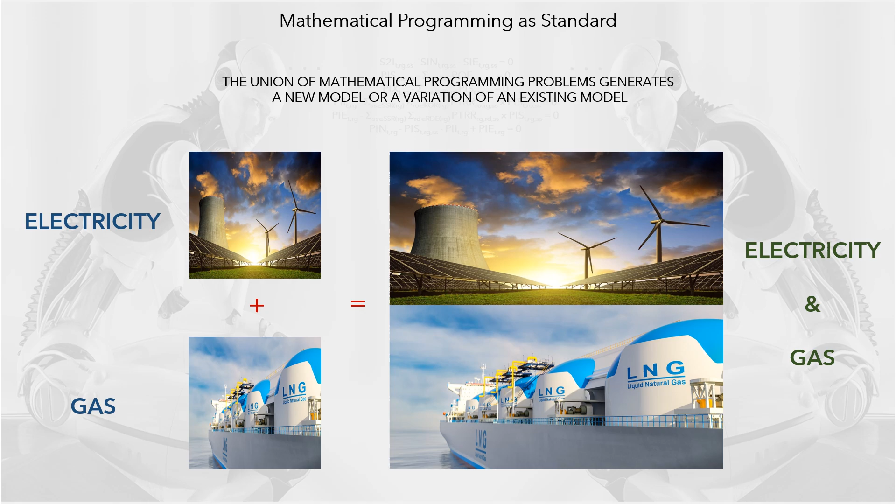natural gas supply chain. OPTEX's multi-problem model capability implies that the union of mathematical programming problems generates a new model, or a variation of an existing model. In this case, two models are formulated: electricity dispatch, and natural gas dispatch. These fundamentals give rise to modeling based on multiple optimization problems, which is the holistic foundation of an organization, called enterprise optimization. The diagram presents what happens when this model is solved optimally. The two problems exchange information, either occultly in a monolithic model, or explicitly in a partition model.

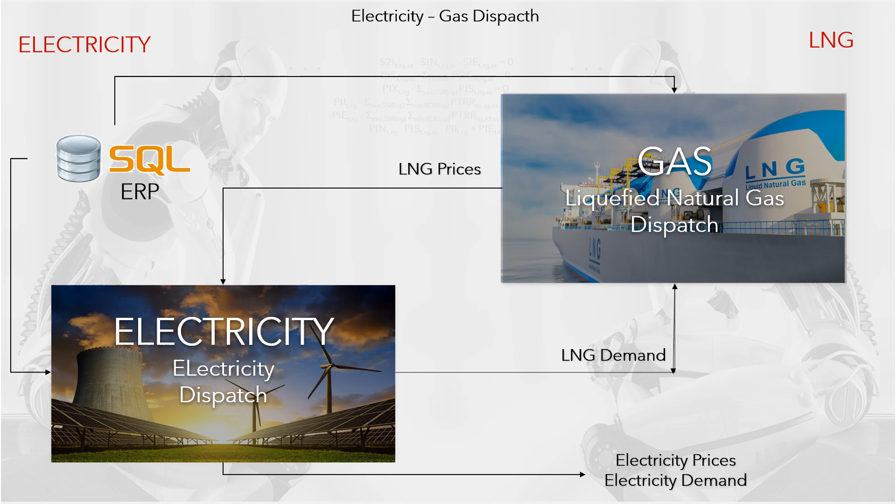Multi-problem modeling without problem limits is what facilitates the theory of multi-problem models, which in turn are the basis of artificial brains, as it allows us to join, divide or modify problems, when necessary and possible. In this way, the core of problems that define high power can be formed, which is electricity, gas and water. The artificial hypothalamus of high power dispatch is composed of these systems.

In general, in an artificial hypothalamus each model can be associated with a type of model. All models communicate via a database, in RAM, or on disk. Making complex models as a Lego game. The expert optimization system is supported by the artificial hippocampus, which stores structures and processes for scientific decision-making that must be permanently consulted. It stores, like in humans, the experience, and the knowledge acquired over time.

In the case of model formulation, a modeler should not repeat work every time he modifies a model. The joining, or splitting, of the models is done by keeping the records in tables. That is, in practice, formulating a problem is selecting, by clicking, the equations that compose it. In the same way models are formulated, as if they were a Lego model, which are formed by a set of equations, the Lego pieces.

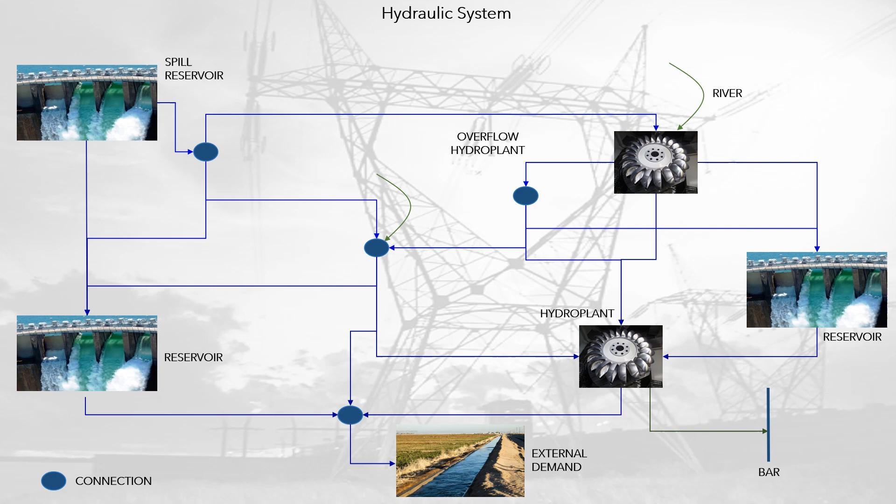Physical modeling, hydrosystem. HI-Water corresponds to a general model that includes all kinds of hydraulic components: reservoirs, hydroelectric power plants, pumping stations, pumping storage, rivers, overflow channels, connection points, demands, irrigation, aqueducts, environmental, industrial. Components can be freely linked to form any topology. Hydroelectric power plants are modeled independently of reservoirs, so plant-reservoir and reservoir-plant connectivity must be established.

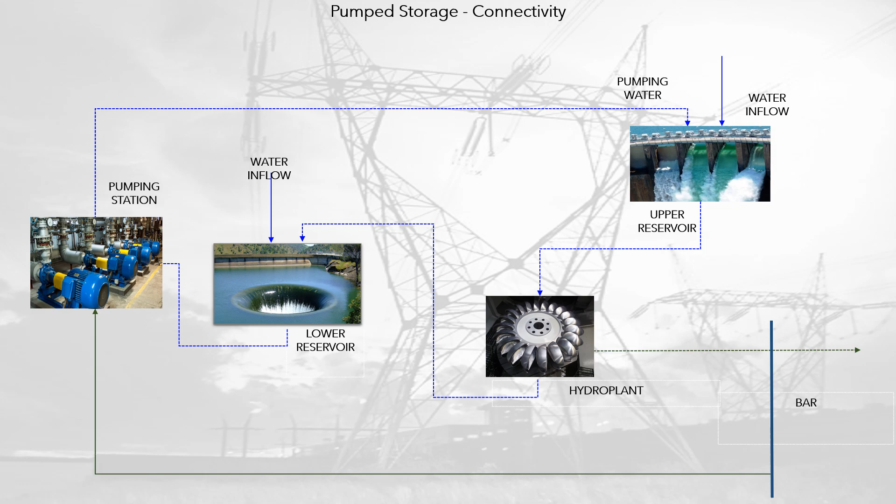The regulation capacity of the reservoir is simulated in detail, so such a simulation consistently represents the dispatch of the power plants, considering their ability to regulate the multi-annual, annual, hourly water resource. For special reservoirs, it is possible to generate established operating rules based on agreements or laws that must be observed when using water resources.

Electrical system. Electrical connectivity is carried out through a network of circuits, links, and bars, nodes, that integrates different types of installations: power plants, hydroelectric, thermoelectric, coal, wind, solar, biomass, places of demand, industrial, cities, regional interconnections and energy storage.

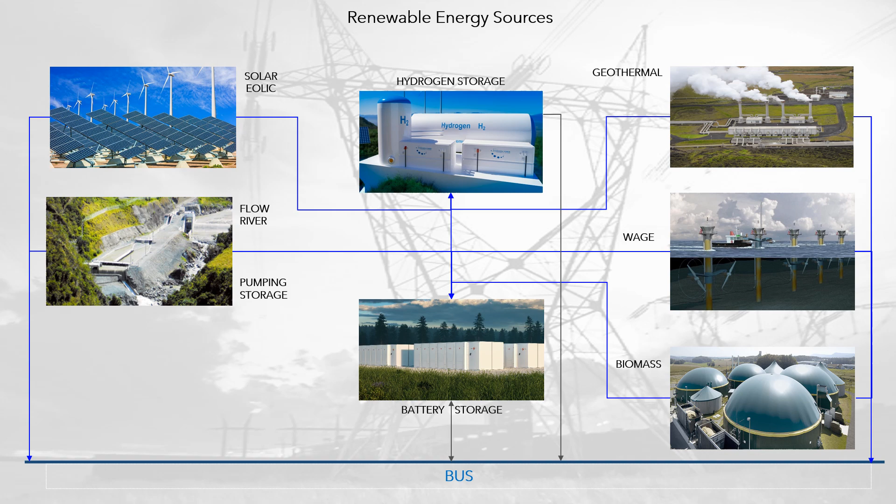For each type of electrical infrastructure, high power includes the exact equations for simulation. High power includes the simulation of several types of renewable energy sources and energy storages.

Gas system. High gas describes the process of supply and demand of natural gas. From this point of view, its integration with the electricity system determines the economic balance electricity-gas. The entities of the natural gas system are: nodes, which connect the gas system installations; production fields; consumption zones, discriminated by sector, for example, refineries, heavy industries, residential, vehicular, and commercial; thermoelectric power plants; transport systems, pipelines, and multimodal transport systems using

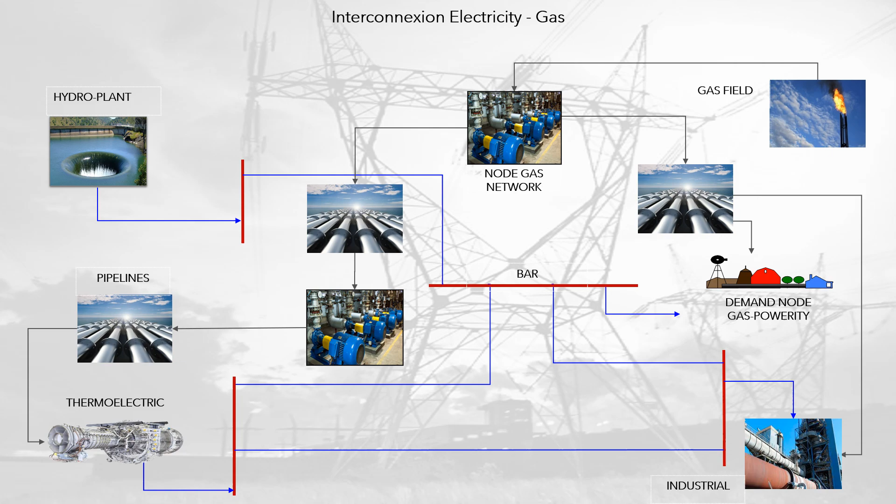vehicles; pumping stations, which compress the gas to transport it; and ports, which receive and/or ship liquefied natural gas, LNG. They are associated with liquefaction and/or regasification plants and have gas storage capacity. Connectivity between the electricity and gas sectors occurs through the demand for natural gas for use in thermal plants, and the substitution of the demand that can occur between gas and electricity.

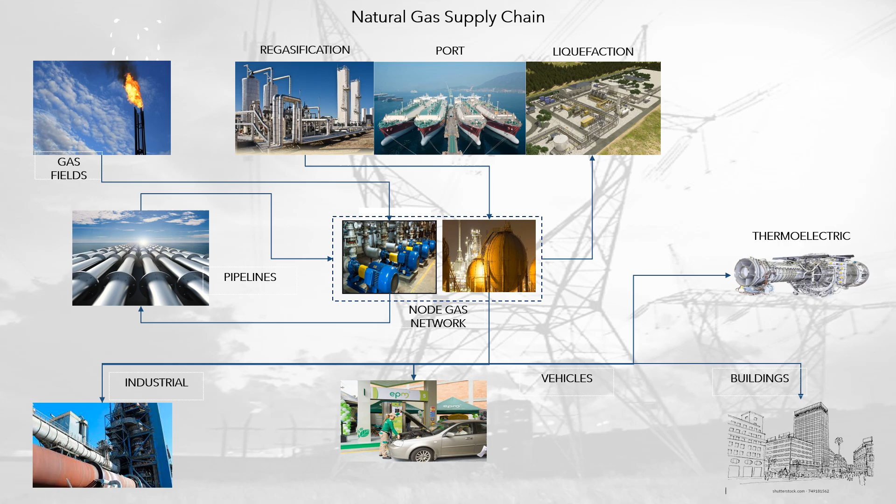Electricity system and wholesale market mathematical models. Traditionally, the optimization models in the electricity sector have been individual modeling with exogenous coordination between models, based on multi-stage stochastic programming, and using large-scale optimization methodologies. The differences provided by high power are integrated holistic modeling, scientific risk modeling, multidimensional uncertainty, parallel optimization, and autonomous real-time

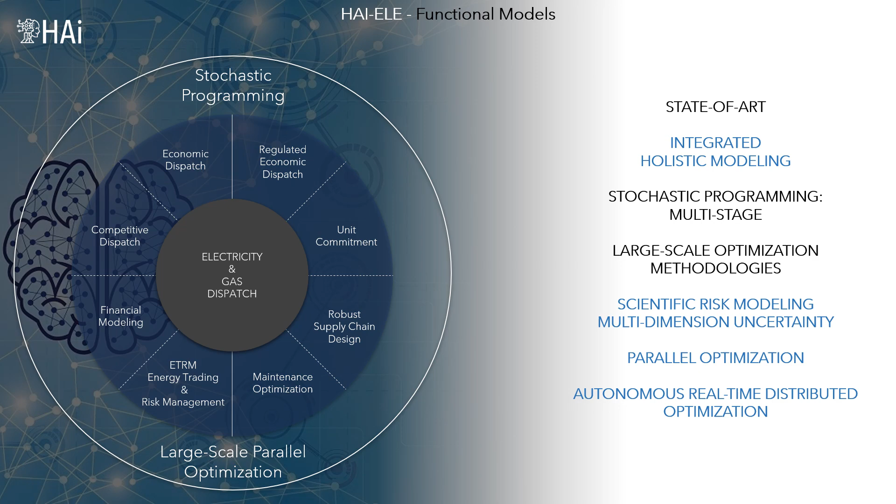distributed optimization. The EED, electricity economic dispatch, model optimizes the dispatch of generation infrastructure, minimizing the cost of operating the electricity system, which simulates a perfect electricity market. EED is the core model of HAI-ELE, as its equations/constraints are used in multiple specific models that the agent requires to address decision support needs.

From EED, 4 models of complementary dispatch are built: economic perfect dispatch, economic regulated dispatch, Nash-Cournot equilibrium dispatch, and unit commitment. The first 3 models are oriented to planning and the fourth to real-time programming. All models that integrate HAI-ELE have been developed using the OPTEX GAMS interface. The integration of the models is carried out automatically by OPTEX, and the generated programs coordinate their communication through the database, using monolithic models, or in RAM memory using large-scale parallel optimization.

All HAI-ELE models can run in deterministic or stochastic version with user-definable uncertainty dimensions. Models can be solved using large-scale technologies, such as variations of Benders' theory, or Lagrangian relaxation, using parallel optimization to simultaneously solve all the problems in which the monolithic model is atomized. Finally, it is possible to introduce new models into HAI-ELE as required.

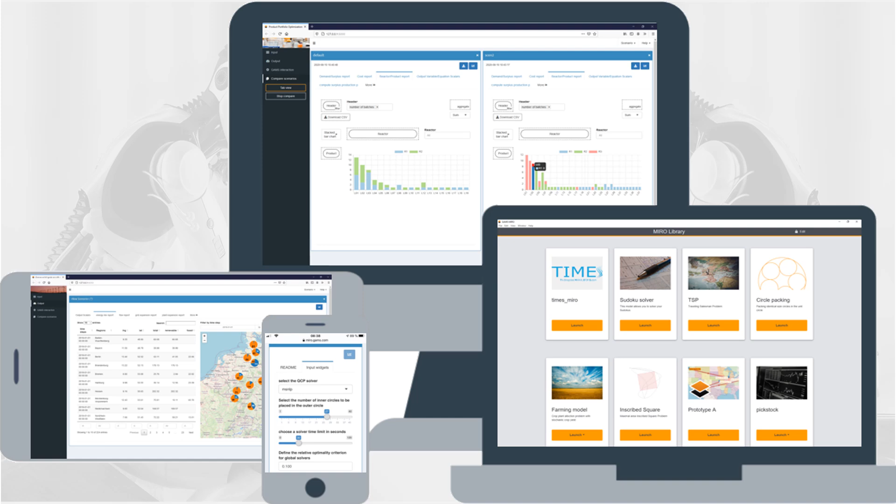GAMS MIRO is the deployment environment for GAMS models. GAMS MIRO desktop is installed locally on a computer, and it is an interactive interface for GAMS models and to deploy them locally or in the cloud. The GAMS MIRO connector is the interface for communication between GAMS and MIRO. This component takes over the data management on the GAMS side.

GAMS Engine is a REST API designed to run in cloud environments. It is an enterprise-grade system that runs on a server and offers features such as high scalability, load balancing via a job queue, rolling updates and much more. GAMS Engine automatically schedules jobs and assigns them to an available GAMS worker to solve it.

Also, it comes with a powerful user management system that allows you to restrict the activities of your users according to your organizational hierarchy. GAMS Engine can not only be controlled by a MIRO application. Thanks to the use of OpenAPI, clients in various programming languages are available. HAI is working to interface OPTEX with the new GAMS optimization technologies, linking OPTEX to GAMS optimization technologies.

The HAI-ELE database is part of a relational information system that integrates all HAI-ELE data. It is managed by OPTEX. It is called IDIS, Industrial Data Information System. In this regard, the following should be considered. The data model is defined in the OPTEX dictionaries, based on metadata from the fields in the tables. The basic structure of the data model can be generated by OPTEX.

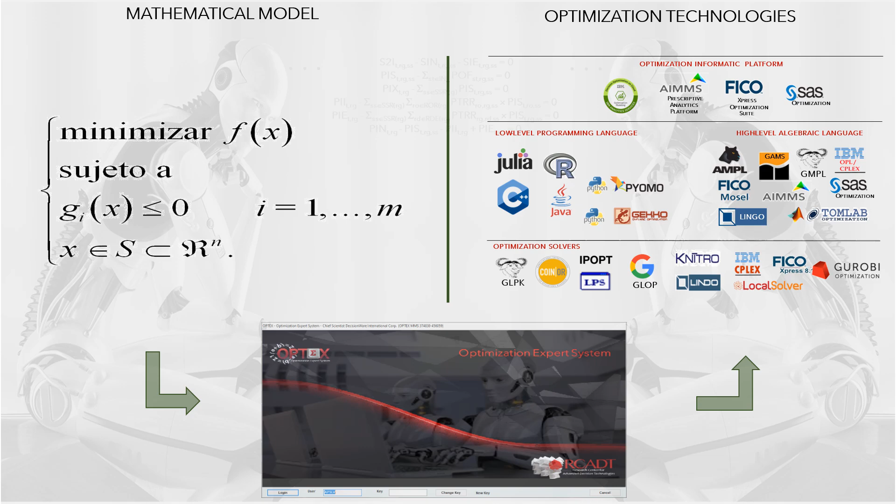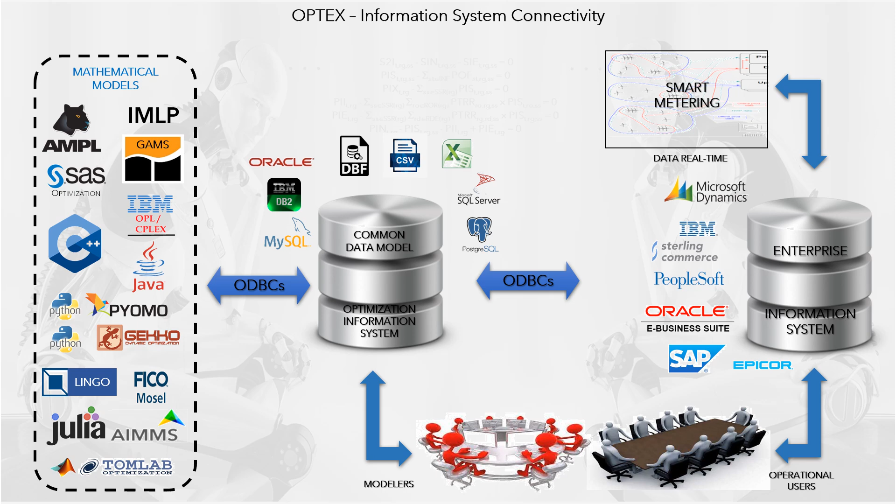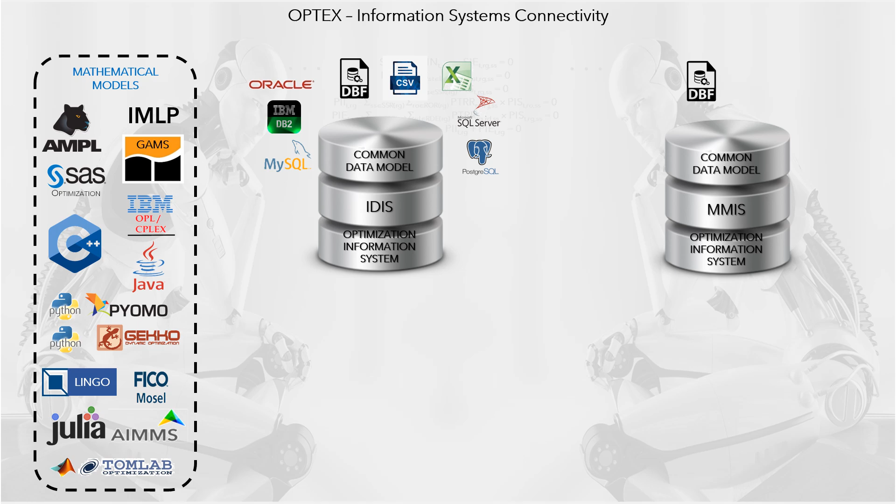The fundamental elements of the OPTEX architecture are a relational information system, which integrates two specialized information systems: Mathematical Modeling Information System, MMIS, stores the entire mathematical modeling environment, and Industrial Data Information System, IDIS, stores customer data.

The next element is OPTEX, the generative artificial intelligence in charge of interpreting the existing information in the MMIS, and from there generating all the computer elements that are required for the user to interact with the DSS. Based on Open Database Connectivity, ODBC, OPTEX generates the following elements: visual interface for the user to access the IDIS to maintain and consult it.

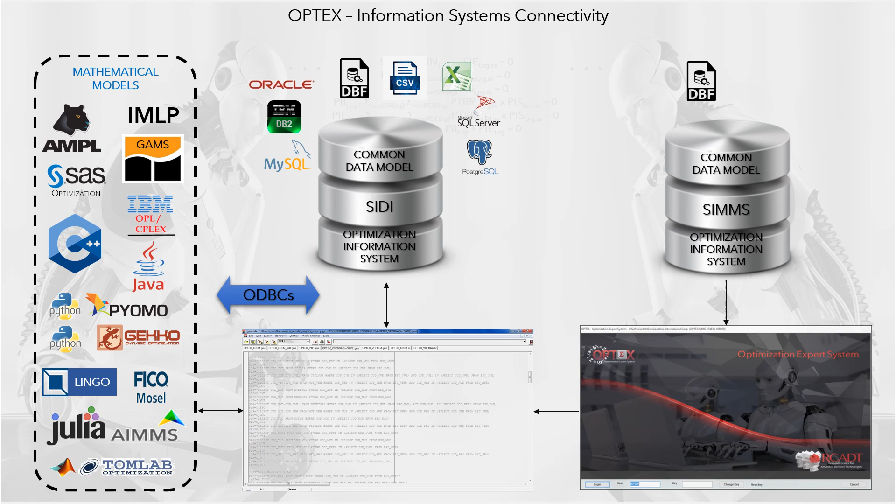Interface for mathematical models to connect with the IDIS, generated following the syntax of each optimization technology. This interface is part of the computer programs of the algorithms. Below are several examples of this type of component, based on SQL statements. The image features standard OPTEX GAMS connectivity.

OPTEX generates all GAMS programs in a multi-problem model, and the user selects the solver to be used. Program generation is done using OPTEX, which then generates all programs needed to run the model using GAMS, General Algebraic Modeling System.

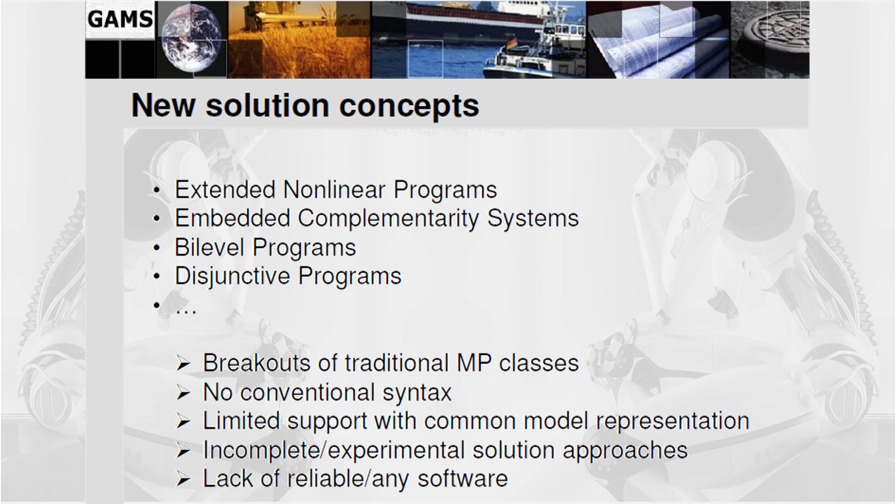OPTEX directly connects the advanced concepts of GAMS, so that the user can use them in the formulation of their model's advanced optimization methodologies, such as extended nonlinear programming, embedded complementarity systems, two-level programming, disjunctive programming, and others. This will not involve programming. The connection to the advanced GAMS concepts is carried out automatically by OPTEX.

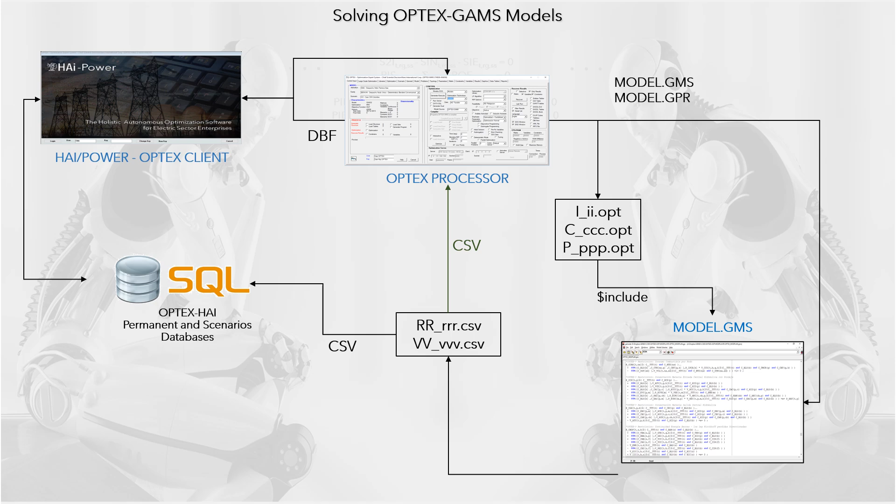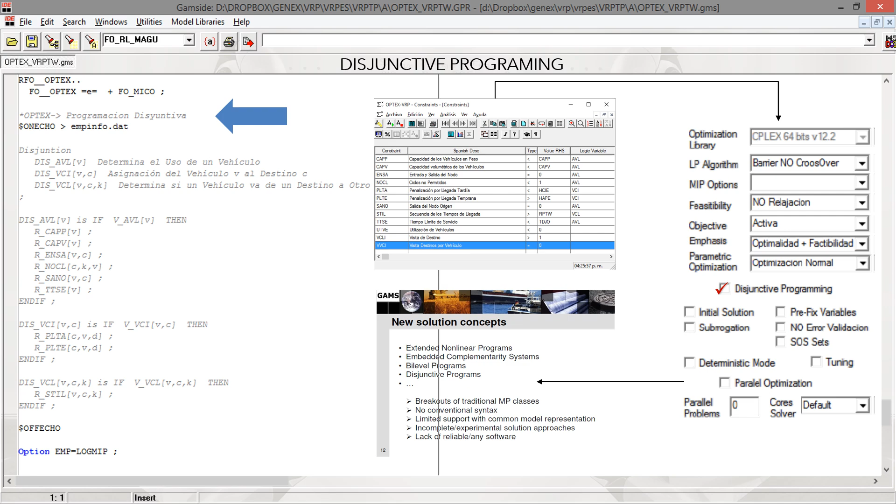The data connection can be made through text files, .opt, which will be incorporated through the $include instruction, or reading directly from a SQL-like relational database. Second, indicate at the time of execution that disjunctive programming must be activated, for those constraints that have a logical variable assigned. The screenshot shows the code generated by OPTEX GAMS to perform the activation of disjunctive programming.

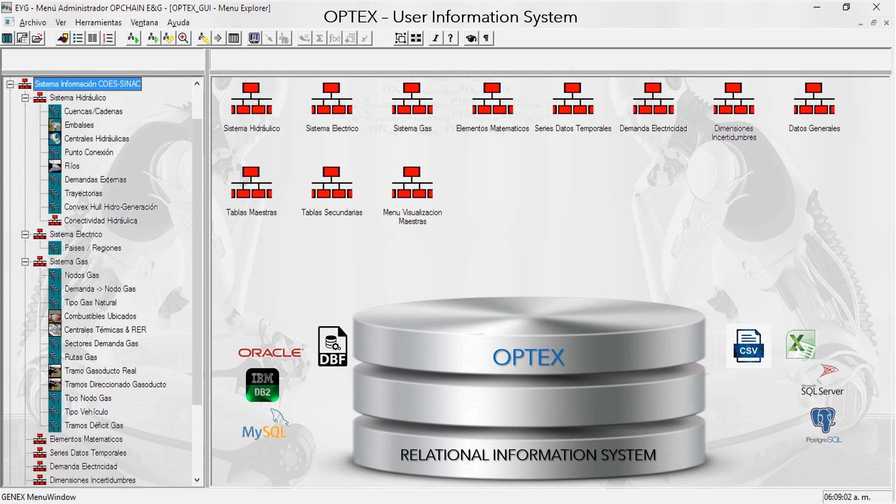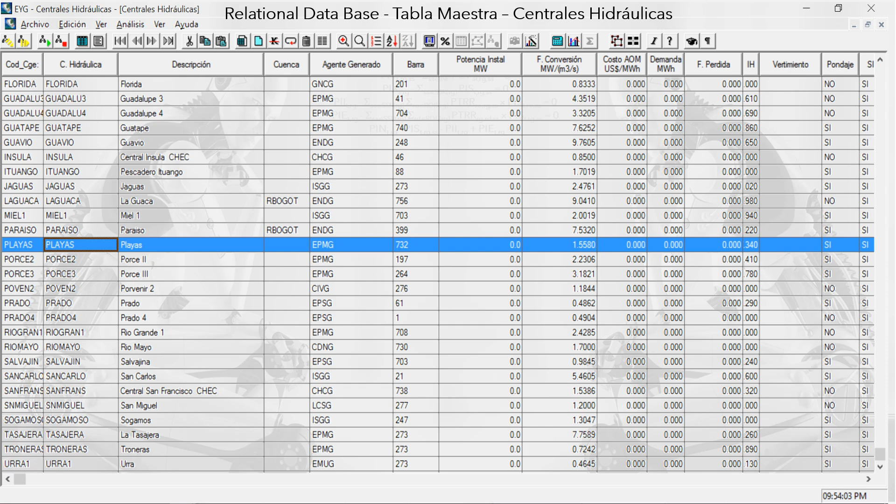The screenshot features a shell window that contains multiple data windows. In this case, the master table of reservoirs and its related tables. The screenshot presents the master table of hydropower plants.

To handle multiple studies, the information system includes the concepts of scenario family, such as the 2014 studies for the expansion of the MODPLAN design, and the scenarios associated with each expansion plan studied. The OPTEX graphical user interface handles all the input and output data associated with each scenario. It is a similar concept to the GAMS MIRO scenarios.

Hydropower Dispatch Model. GAMS programs. OPTEX manages 4 types of models, all of which are used in the hydropower construction process. This is valid for any mathematical model made with OPTEX. Deterministic optimization model. This is the standard or core model, which considers a single internal scenario.

Non-anticipative stochastic optimization model. Starting from the stochastic parallel model, a non-anticipatory response is required, that is, the decision depends on what is happening in the stochastic dynamic process. In these cases, each scenario has its probability, looking for a solution that optimizes a measure of system performance by integrating the scenarios, such as expected value or other statistics. The solution must be obtained by introducing a model coordinator aimed at ensuring the constraints of non-anticipation and the optimum of the objective function.

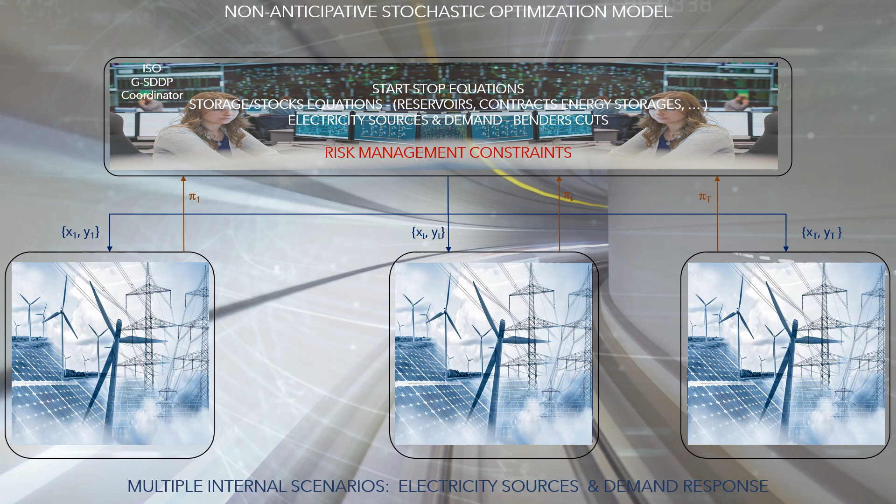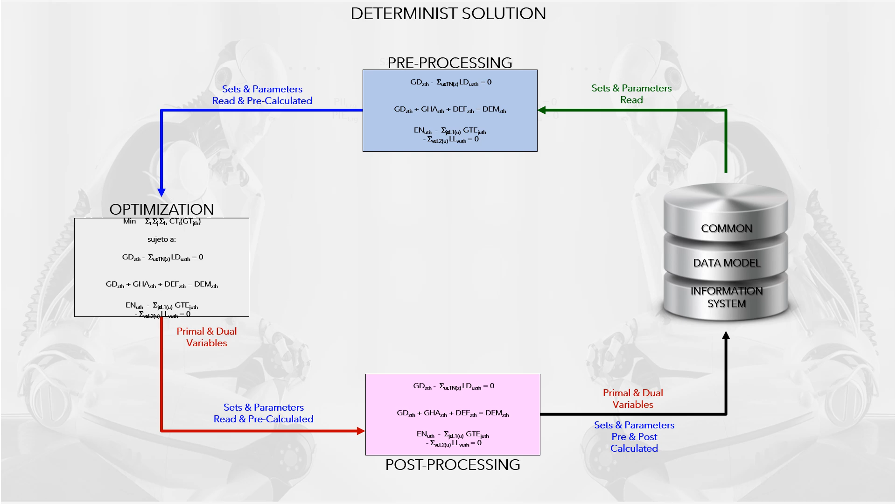Hydropower dispatch deterministic model. GAMS program generation. Deterministic models operate without cycles, solving a single monolithic problem, which has 3 steps. Pre-processing, reading the database and calculating everything that needs to be adjusted before performing optimization. Optimization, solving the math problem, and post-processing, calculation of result variables that are definitions that are not part of the model, and storage of this information in the database. This part of the program is presented below.

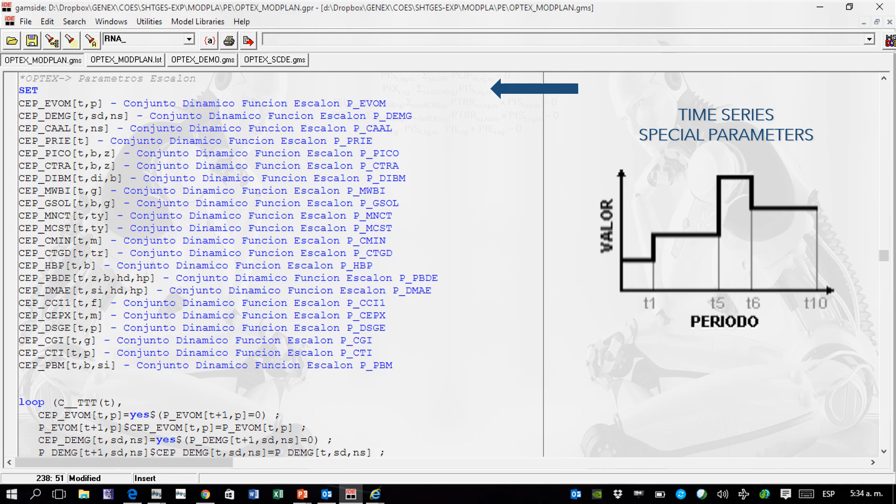The GAMS program is presented in parts, indicating in each case the content of the partial image. Model header and indexes declarations. Alias indexes declarations. Time standard parameters declarations and reading. Using an include file. Read sets declarations and reading. Read parameters. Transformation of read time series parameters. From the data read in the tables, OPTEX can calculate 3 types of dynamic parameters: impulse, polyline, and stair.

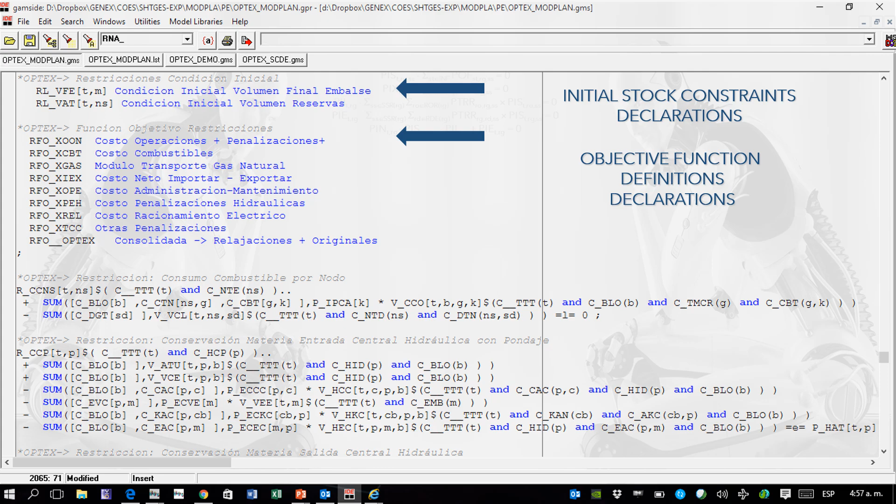Calculated parameters and calculated sets. OPTEX solves the correct order for declaring parameters, sets, variables, and constraints, considering the relationships between them. This is a common problem in other algebraic languages. Model variables declarations. Objective function variables. Model variables bounds. Constraints declarations. Initial stock restrictions declarations and objective function definition instructions.

Constraints algebraic formulation. Conditions of existence constraints. Conditions of existence variables. Objective function equations. Creating CSV files. Model variables include. This code is included in the program using an include.

High power dispatch, ModPlan model, transmission expansion planning, Peruvian transmission system. Project: electric and gas system and market dispatch for Peruvian transmission expansion plans. Challenge: to develop an integrated electricity and gas dispatch model to support the optimization of the national plan of transmission in Peru. Solution: design and implementation of a set of mathematical models that includes simulation of simultaneous optimum dispatch of electricity and natural gas systems, and the evaluation of multiple expansion uncertainty scenarios, to build Pareto curves that support the selection of a robust expansion plan.

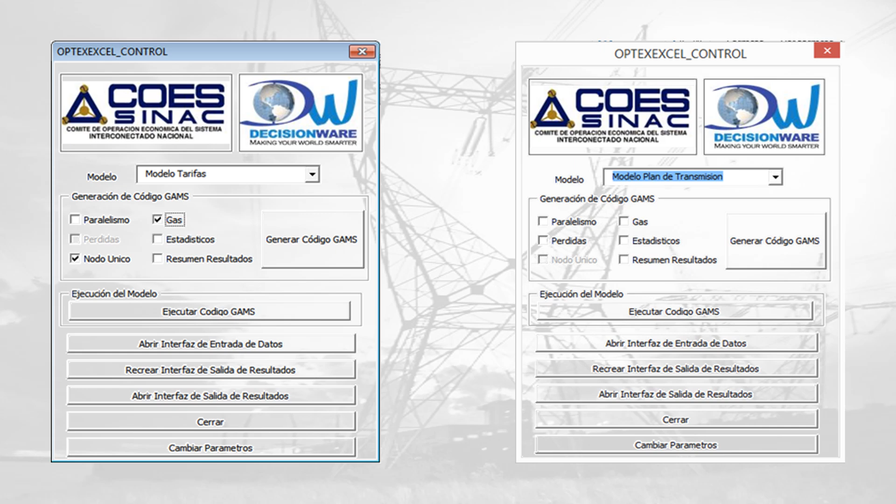ModPlan is made up of 3 models. ModPlan rates, a version of the Perseo model, which Osinergmin uses for the price analysis of the Peruvian interconnected system. ModPlan, the central model for the construction of transmission system expansion plans, and ModPlan attributes, a post-processing model that produces indicators of the operation of the interconnected system, for the analysis of an external scenario of the expansion plan. The screenshots show the ModPlan control from an Excel sheet, which is used by the analysts who build the transmission expansion plan. The ModPlan model was developed using a high-power version mounted in OPTEX, as a starting point.

COES-SINAC, the ISO of the Peruvian electricity system, must build the expansion plan of the transmission system in accordance with the methodology specified by the Peruvian law. ModPlan considers two types of scenarios, internal and external. The internal ones are those considered by the stochastic optimization model. These are called by COES futures, and are built based on multiple uncertainty dimensions.

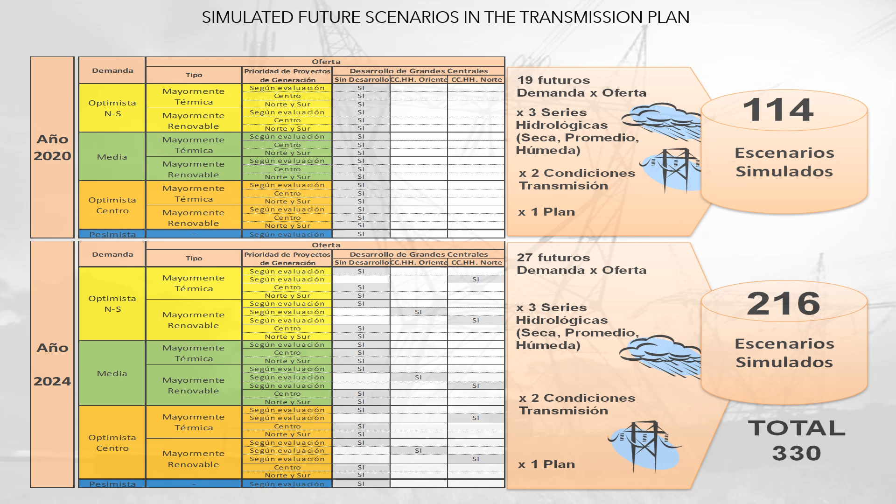The model runs every certain number of years for an external scenario, which corresponds to a possible expansion plan. One of the external scenarios analyzed will be the solution suggested by COES for the expansion plan. The image presents two periods, 2020 and 2024, the first with 114 internal scenarios and the second with 216. Examples of dimensions of uncertainty: fuel prices, hydrology, demand, investment of generators, variation in the costs of works, and others.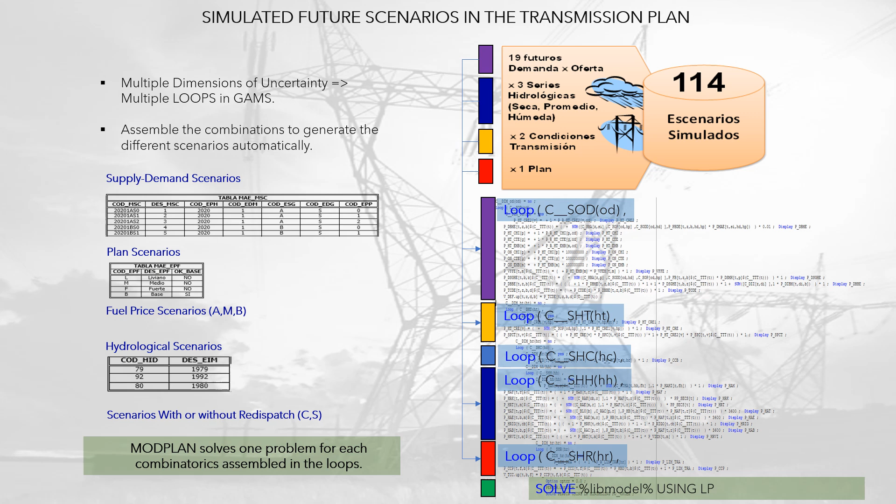OPTEX does not impose limits in this regard, and the user can configure the number of uncertainty dimensions that are necessary. Multiple dimensions of uncertainty generate multiple loops in GAMS. OPTEX assembles the combinations to generate the different scenarios automatically.

MODPLAN can be solved without parallelism in a loop for all internal scenarios, occupying a single CPU thread. In the case of parallelism, it is necessary to modify the programming to handle the process. Multiple CPU threads are used; at least one thread must be free, if not, the computer will get stuck.

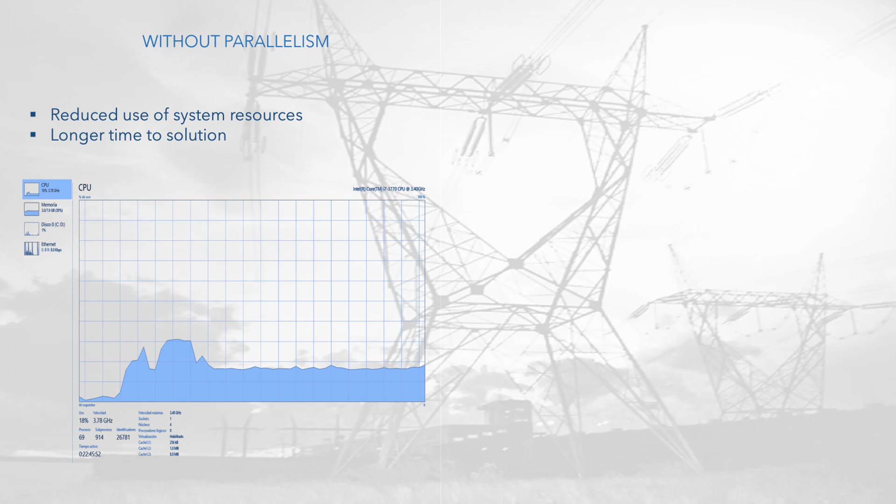No parallelism: MODPLAN was deployed on a workstation with 12 cores using just one. This approach resulted in lower use of system resources and long solution time. In parallel, 11 cores were allocated to mod plan, increasing the system's resource usage and shortening the solution time.

The speed of execution is a determinant of the number of expansion plans that can be studied, and of the internal scenarios that can be incorporated into mod plan. The trend will be the growth of the scenarios in a similar way to how the power of computer technologies grows.

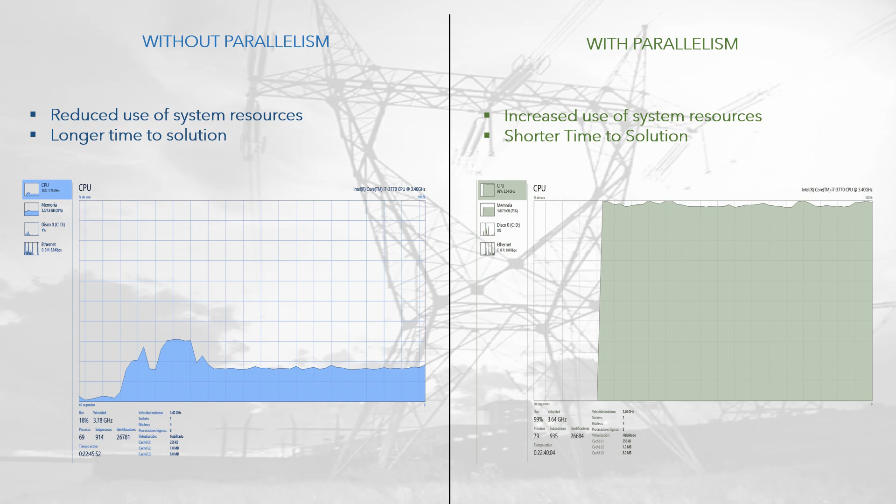MODPLAN. Parallel and stochastic implementation using GAMS. In 2004, General Algebraic Modeling Systems Incorporated, GAMS, reported experiments and the speed gained using 200 CPUs in parallel was 60 to 1 times faster, with its corresponding benefit in accuracy, if parallel processing is used to increase the quality of the results.

Stochastic parallel models involve the coordinated solution of multiple independent problems that can be solved sequentially or in parallel. The mod plan model, developed for the ISO of Peru, works in parallel and was generated using OPTEX. This part of the program is presented below. The implementation of the parallel mod plan was carried out by coordinating everything within a single GAMS program.

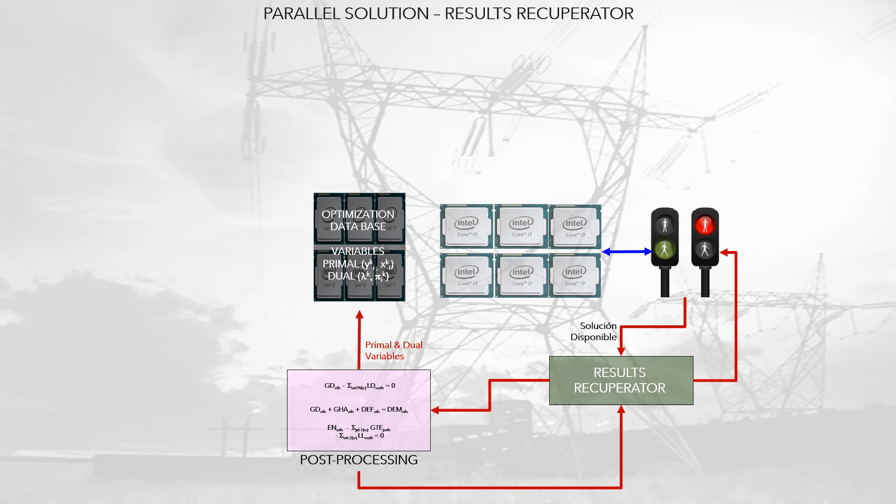The methodology consisted of programming, in the same program, a part of the problem startup using a traffic light system that informs the first core that is free. Another section of the program is aimed at results retrieving, asking the traffic light system to determine which cores have completed their task, to execute the recovery process.

Using a single program, the two processes are performed sequentially, which can cause waits in the launch queue, or in the recovery queue. These timeouts can be eliminated if OPTEX generates two programs, one aimed at launch and the other at recovery.

High-power dispatch mod plan parallel and stochastic GAMS program generation. The image presents the flow diagram of the two cycles controlled by the traffic lights. The OPTEX control window part is related to the activation of the parallel processing option, so that OPTEX generates the parallel code. This part of the program is presented below.

As stated above, in the case of parallelism, it is necessary to modify the programming to handle the process. As you can see, the sequential and parallel solutions solve the same problem, but the data flow is different, since in the parallel case the processing is distributed in multiple cores.

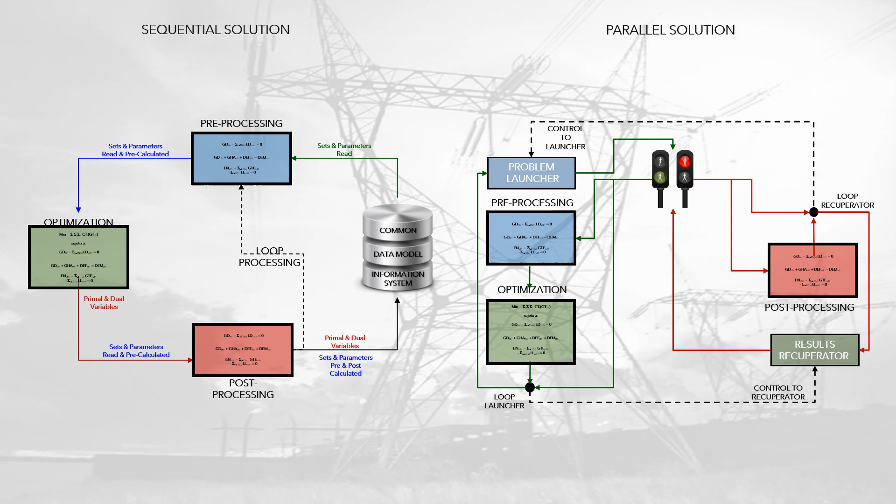The problems are deterministic, but they are indexed to the values of the uncertainty dimensions of the model, which vary with the outermost loop that must sweep the entire combinatorics of the values of the uncertainty dimensions. Then the strategy of parallelism will be to solve deterministic problems, as parameters of the uncertainty values.

The screenshot shows the deterministic model variables declarations. The physical indexes are the same as those of the deterministic model. In addition, the indices of the uncertainty dimensions must be defined, which are 7, but 2 of them depend on other indices. Therefore, there are 5 effective indices of uncertainty.

Since the deterministic problems do not contain the indices of the uncertainty dimensions, a RAM database must be created to store the results of each problem, containing the expanded indexes, physical entity indexes, in green, plus uncertainty dimension indexes, in blue. On the other hand, for each tuple of physical indices, at least the basic statistics should be stored: value, average, maximum, minimum, standard deviation, in yellow.

The screenshot presents declarations of statistics of the variables of stochastic optimization models. When solving a problem, it is necessary to store the results from the parallel solution. Creating CSV files for deterministic model variables at the beginning of the problem. At the end of the optimization process for all problems, statistics for deterministic model variables must be calculated. Deterministic model constraint declarations. Declarations of statistics of the constraints of stochastic optimization models.

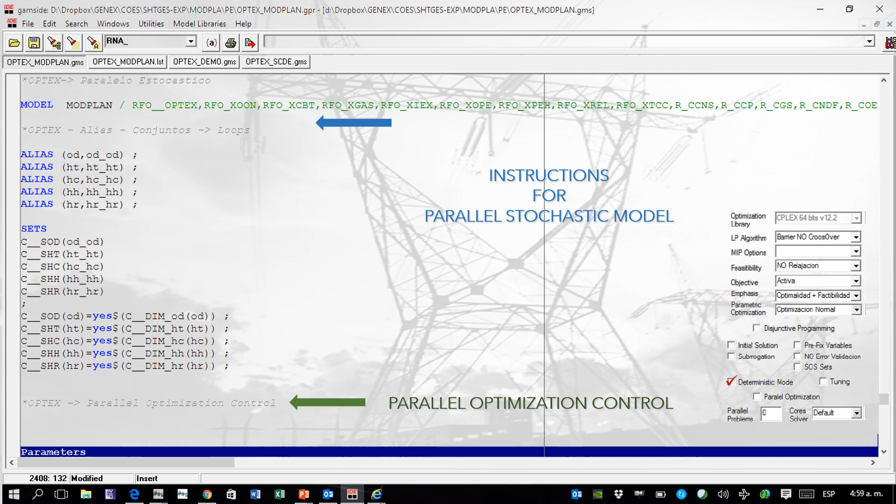The control of sending problems to the cores, and retrieving the results, is carried out using 2 loops, which work sequentially. Therefore, it is not possible to send and receive simultaneously. For this it would be necessary to generate other auxiliary programs. This possibility is faster. Before starting the loops, the mod plan problem must be initialized, adapted to the parallel version. This involves defining aliases for indexes and sets that are required for parallel implementation.

At the beginning of parallel optimization control, the first loop to be presented will be the recovery loop. Submitting process for parallel solution. The screen shows the opening of the loops of the dimensions of uncertainty and recovery process for deterministic solution. Writing CSV files of deterministic model variables. Storing general results for parallel solution.

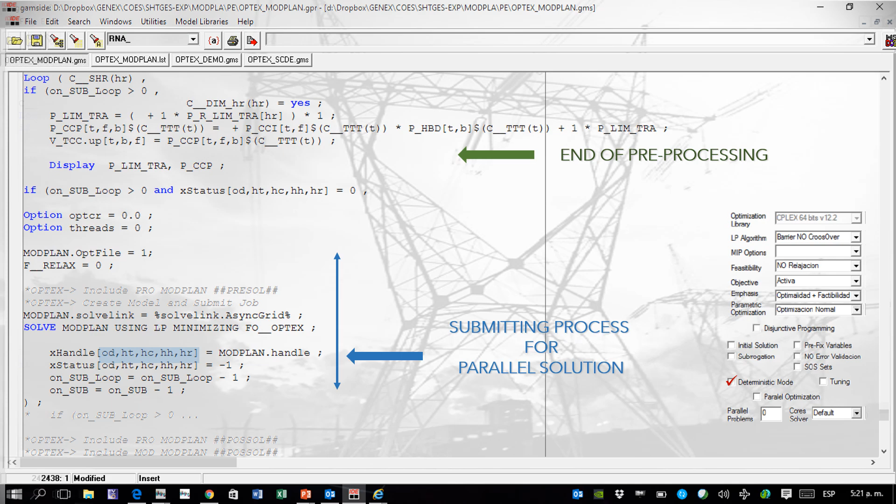And closing loops. The second loop to be presented will be the launcher loop. Loops to generate the problem for each scenario. OPTEX automatically generates the pre- and the post-processing of the stochastic parameters and stochastic sets for each scenario. This involves solving the pre-processing of the modplan. Next step is submitting process for parallel solution.

Closing loops. The final part of the process has to do with performing the final calculations, closing files, and activating other processes. When the solution of all problems is finished, it is necessary to execute the following process. Calculating statistics, closing files, and statistical files. The following screenshots show the code.

Calculating statistics of the variables. Closing CSV files of deterministic model variables. Creating, writing, closing CSV files with statistical variables. To end the process, it is possible to run a custom process, even by the user.

High-power dispatch model. Large-scale optimization technologies. GAMS programs. Speed up modplan through modplan GSDDP. In the future, the real-life problem solution based on mathematical programming, applied to large physical and social structures/organizations, must be based on multi-level parallelism using the modern computational architectures.

Then, large-scale optimization methodologies are the way to atomize an optimization mathematical problem in multiple types of subproblems that can be solved using the concepts of asynchronous parallel optimization and real-time distributed optimization. High power may use methodologies like Benders' theory, Lagrangian relaxation, Dantzig-Wolfe decomposition, column generation, disjunctive programming and its variations. These methodologies may be combined using cross-decomposition concepts to implement parallel and/or distributed optimization.

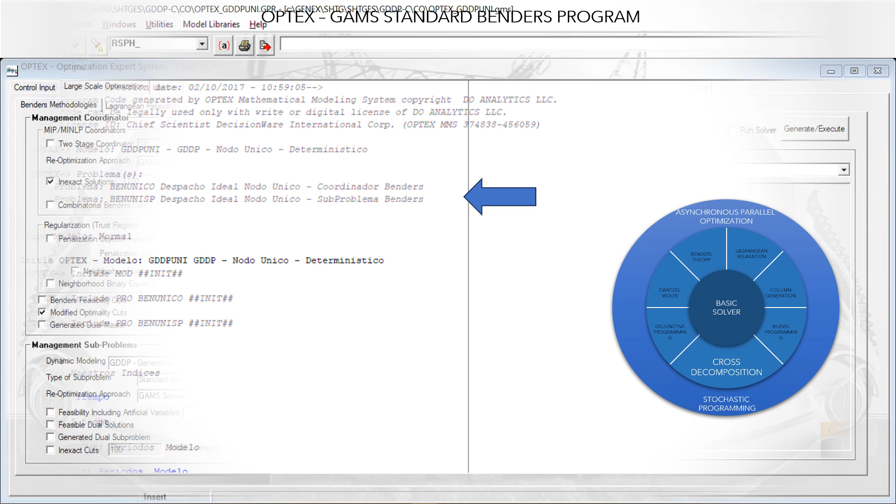In 1962, the Dutch mathematician Jacques Benders publishes his theory of partition, a transcendental step, not the first, in parallel computing, aimed at solving complex mathematical problems by dividing them into more elementary subproblems. The display corresponds to the header of an OPTEX GAMS using standard BT.

GDDP, Generalized Dual Dynamic Programming. And, in 1991, Jesus Velasquez Bermudez, founder and chief scientific officer of HAi, developed the first version of what would end up being called GSDDP, Generalized Stochastic Dual Dynamic Programming. They are variations of Benders' partition theory, which were formally published in 2002.

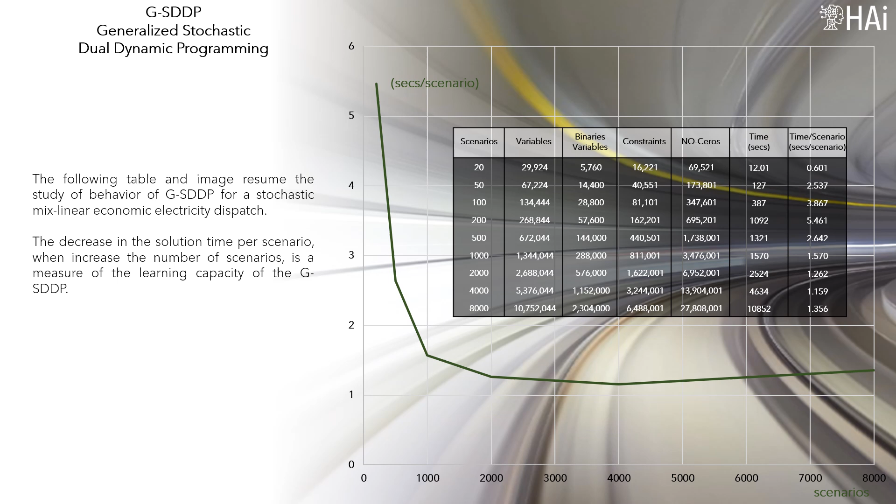Speed up modplan through modplan GSDDP. The standard parallel version of modplan can be accelerated to further reduce the execution time. To do this, GSDDP technology, developed by HAi, may be incorporated. The idea is to include an artificial hypothalamus that accumulates information from all the problems executed, to speed up the solution of the remaining problems. This RAM database would store the dual and primal variables to incorporate cutting planes as new problems arise. As in the current version, OPTEX would generate all the modplan code.

The power of enterprise artificial brains. Artificial brains are backed by the technological capacity of computing. It is traditional to associate mathematical modeling with large-scale computing, which today is linked to cloud computing, integrated by supercomputers of bits, and by the birth of quantum computers, which are the beginning of a new era. The current state of computer technologies involves the integration of edge computing and cloud computing to implement systems with multiple highly complex mathematical models that can be run in parallel. This allows us to talk about autonomous real-time distributed optimization.